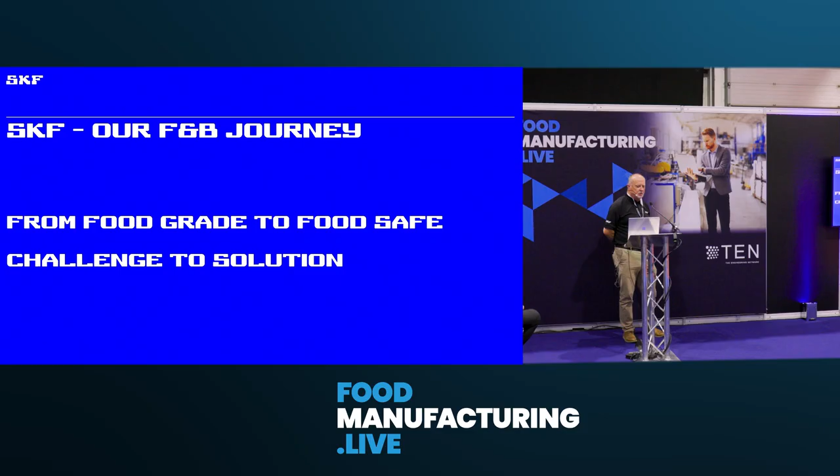Our food and beverage journey, from food grade to food safe, is very product-specific and application-specific. If you look at the pain points and challenges companies face, especially end users within the food and beverage industry, you're looking at strict cleaning regimes. These are outcomes of the increasing demands on factories to become safer, especially food safe, and this is costing unplanned and frequent production stops because washdowns are so harsh and violent that they cause bearings to break down.

To overcome this bearing breakdown, people are then over-lubricating their assets, causing more spend on lubrication and again unplanned and frequent production stops to lubricate. This then results in grease leakage because people are lubricating to purge, and this grease causes hazards, slip hazards, and an area for bacteria to collect.

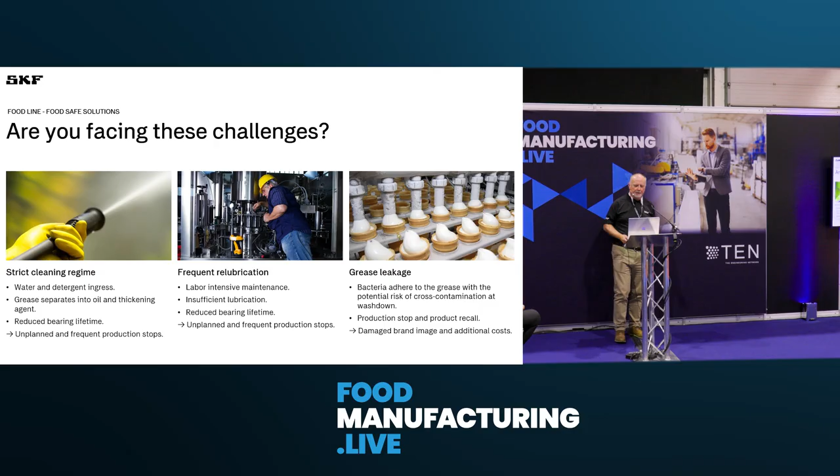With those in mind, we've come up with a product-specific range of food line offers. It all started with our blue line units. We changed everything within the blue line unit from an item which could be lubricated to a relubrication-free housed unit. This is typical for all of our housed units, and they come in all sizes and shapes to suit the market, so everything is retrofittable.

The technology we've put into this is all application-specific. We've got a back seal, a front cap good up to 70-90 bar, and beyond that a gutter seal. The main area we changed was the grease - we played with the grease and made it less susceptible to breakdown from the caustic solutions and detergents that people use.

With the blue line unit, the take-up was brilliant. We've had really good success with it. We've trialed it and it's really proved itself.

To further advance our range, we then introduced it into our deep groove ball bearings. Some of these are fitted non-food contact and food contact, but we've made all of our bearings food grade, so you'll have food grade grease in each of our bearings. So we don't go over expensive, we made them in a range which is standard bearing material - not stainless steel, but you get a good seal on there. The seal is specific to the speed it needs to move at and to keep the conditions out.

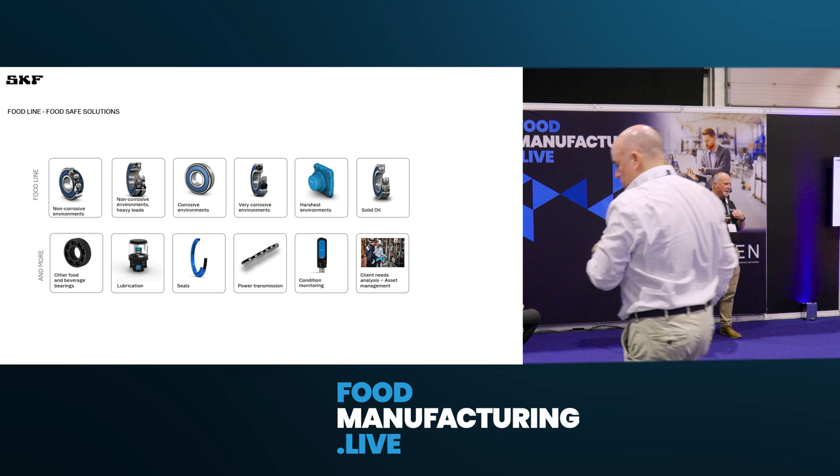The basic condition monitoring is specific for food and beverage because of the slow speeds, so we're able to read slow speeds and monitor critical assets. This has become very popular with pumps and motors, where a catastrophic bearing failure would cause a big shutdown, which costs money, so we can help eliminate that by giving a warning.

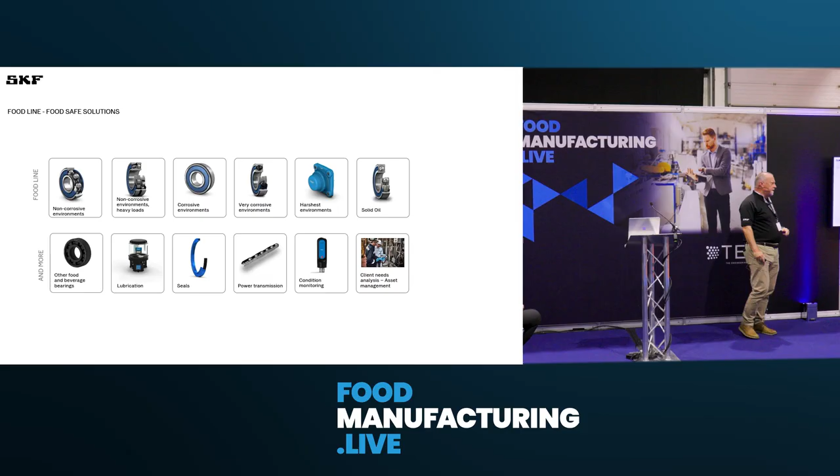To find out more about these products, come and have a chat with us on Stand 45, and we'll take you through all the benefits and features of it. We're not being product specific today with this presentation; we're giving you an overview of what SKF are doing at the moment.

By introducing those products, we've then introduced food safety, which has really been paramount to the reason for everything that we're doing.

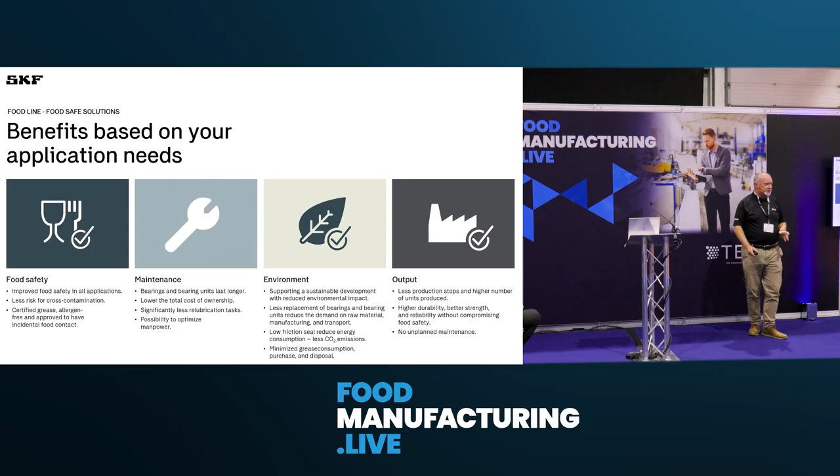Maintenance, so you're freeing up your maintenance problems. By having a bearing which lasts much longer than a standard bearing, we're freeing up the maintenance requirements. Being kinder to the environment, our housed units are 100% recyclable, and if not fully recyclable, they can be burned for energy. Our steel bearings can be remanufactured as well, so we're being good to the environment.

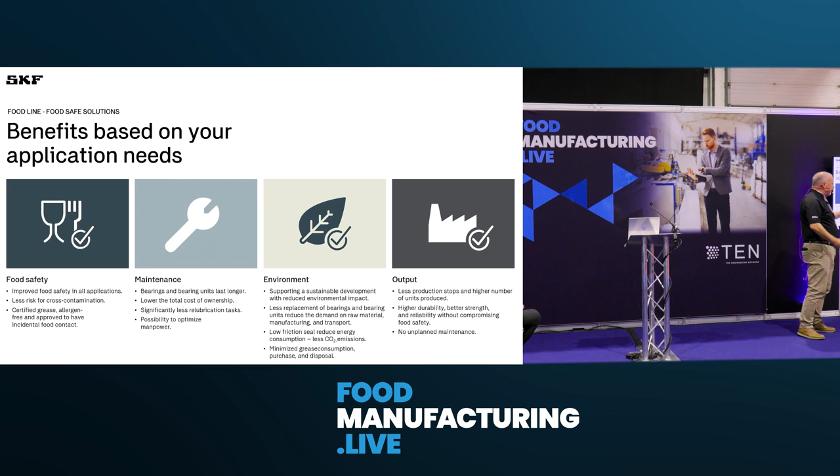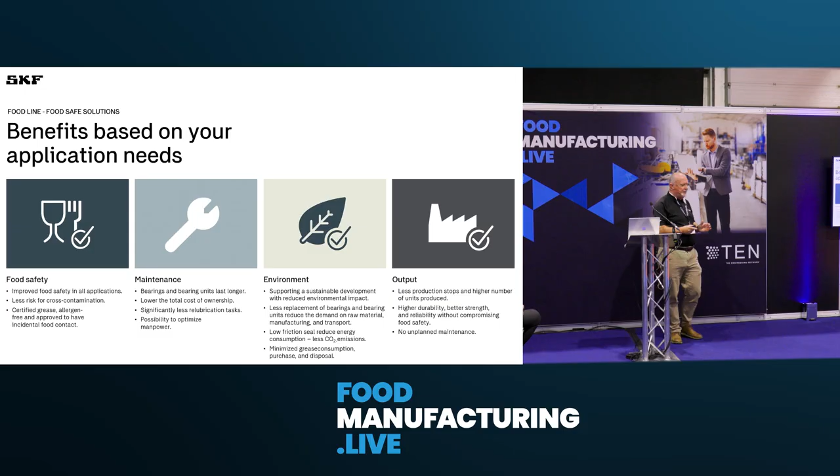For the output, we're lessening unplanned maintenance, so you can have a more planned maintenance regime instead of firefighting, and you can be a bit more sustainable.

To complement all our products, we've got our food grade seals, food grade grease, and IP69 seals. These are really important features. You're safe to know that any bearing we supply within our food range has got food grade grease and a food grade seal.

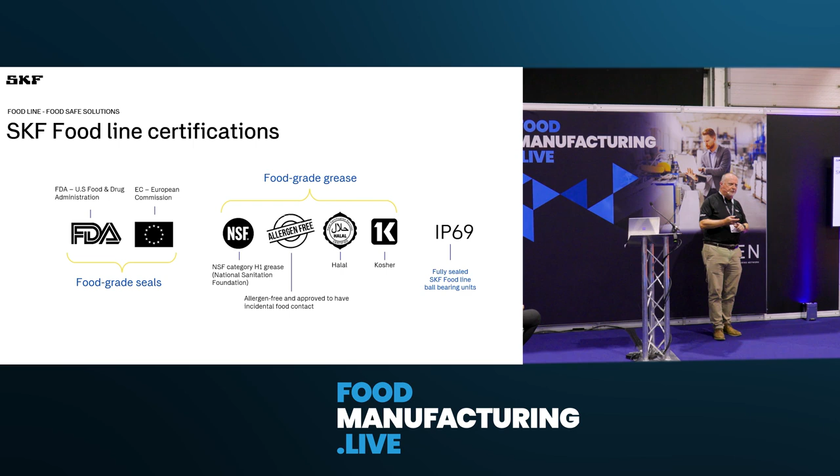If you look at what you can alter, 36% of bearings fail because of poor lubrication, and we can change that by introducing our range of products and our lubrication offers, because we understand what the bearing does. Being SKF, we manufacture the bearing and the lubrication products, so we can lessen that 36% down.

Contamination is another factor we address through our seals and what we've done with the food line bearings, along with our ability to work with customers and see where their problems lie. Poor fitting accounts for 16%, and other items make up a big portion as well, so we can start changing things around and make sure our bearings last longer.

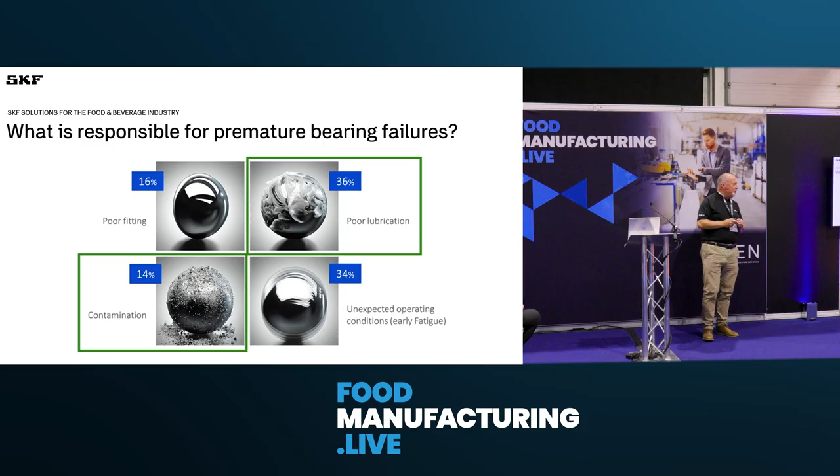Your bearing is a requirement within your rotating products, and what we want to do is make that bearing last as long as possible for you. So we always work to the bearing life cycle.

With the bearing life cycle, really important, we start with buying a bearing — purchasing through authorized distribution. This is really important because with an authorized distributor you're getting an authentic bearing. If you go through an independent, it may not be authentic, and we can't give you support on that. We'll fully support you if the bearing is bought through authorized distribution.

Then we look at mounting the bearing. We can give you worksheets on how to mount it efficiently, and we can also give you the right tools to do that. Then you're looking at lubrication — we can advise on lubrication and alignment, again all important features, along with our basic condition monitoring, which we've talked about.

We can also tell you how to efficiently dismount the bearing using the right tool. We have an app for this — it's called Bearing Assist, available on the Apple Store. If you come down to Stand 45, we can take you through all the features of that app.

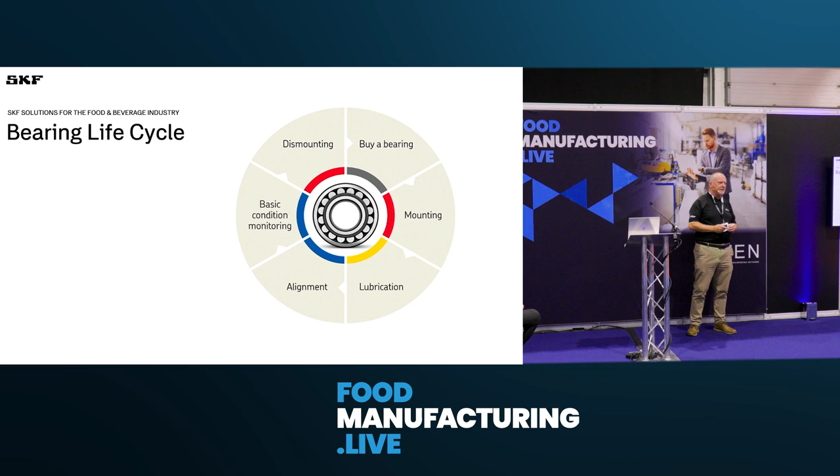To further complement SKF's journey, we are looking at becoming a really sustainable company. So we're working with the right people, and we are Platinum EcoVadis, and we're looking to be carbon free within 5 years. That's a journey we've committed to. We want to be there with where all the right companies are going, and I think it helps us when we're talking to machine manufacturers about what our journey is, and it suits their journey as well.

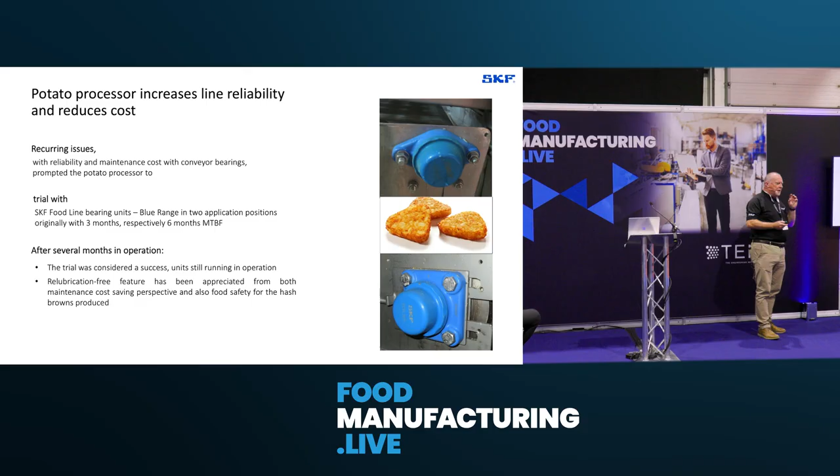So just to give you a few examples, and I hope you're not squeamish, in some of our processes we've been able to come up with real solutions. This was a company manufacturing items which needed to be food safe, and they were getting a lot of audits. So we introduced a product that outran the original product they were using. The mean time between failures doubled, and we were able to help that customer increase production. But at the same time, we became a feature with the auditors, so when they'd come in and see a Blue Range unit that's not re-lubricated, it's really clean, cosmetically perfect.

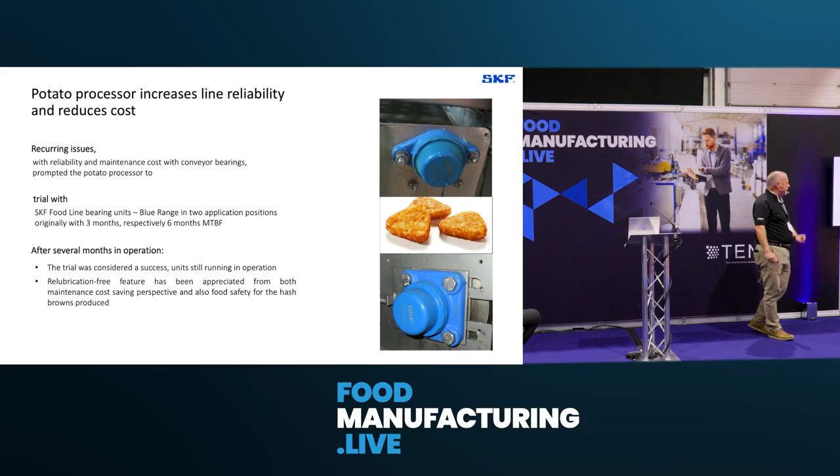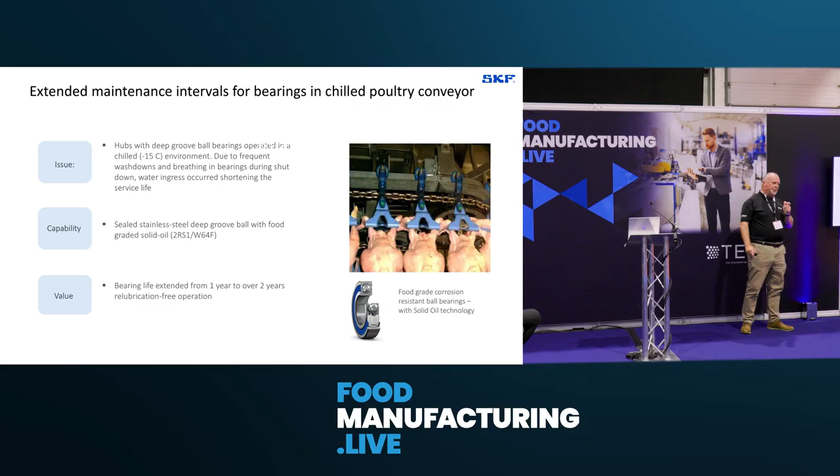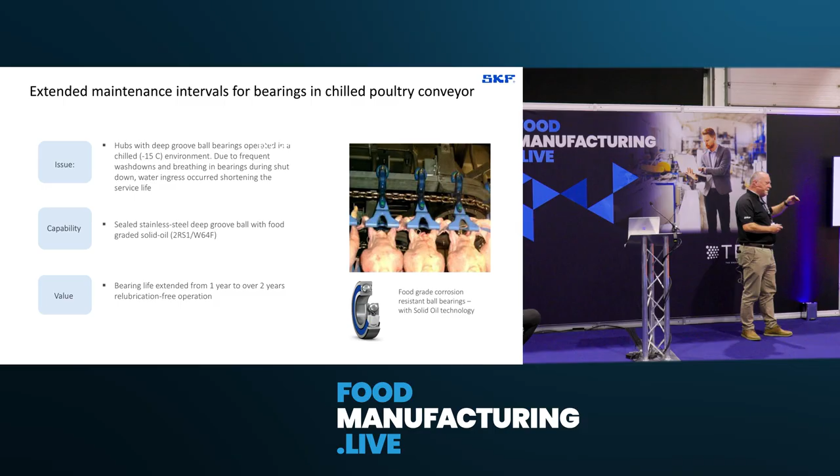Using one of our deep groove ball bearings with a solid oil, we solved a problem within a chicken processing factory. The importance here was the area was really humid, a really wet environment. The bearings were breaking down because of contamination, and this caused a bottleneck at the beginning of the process, just after the chickens have been plucked. This was unacceptable to the company. So we went in, looked at it, and brought in our Food Line bearing with solid oil and our seals as well. This was a real plus point, and we've moved this into lots of different poultry companies as well.

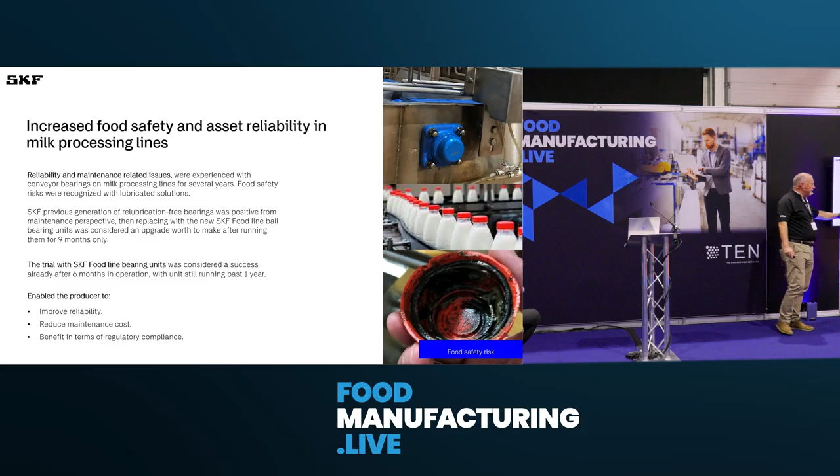And then this is what we're talking about grease-wise. This is a standard unit, this is the sort of thing you're seeing. We used this in a milk bottling plant, and we improved reliability by inputting our units and reduced maintenance costs. The offshoot from this is that we moved within a lot of dairy companies as well, and the uptake of our product within dairy companies has been second to none, because this is really unacceptable when you've got a cap full of grease, you take our cap off and there's no grease in it because you haven't been able to lubricate it.

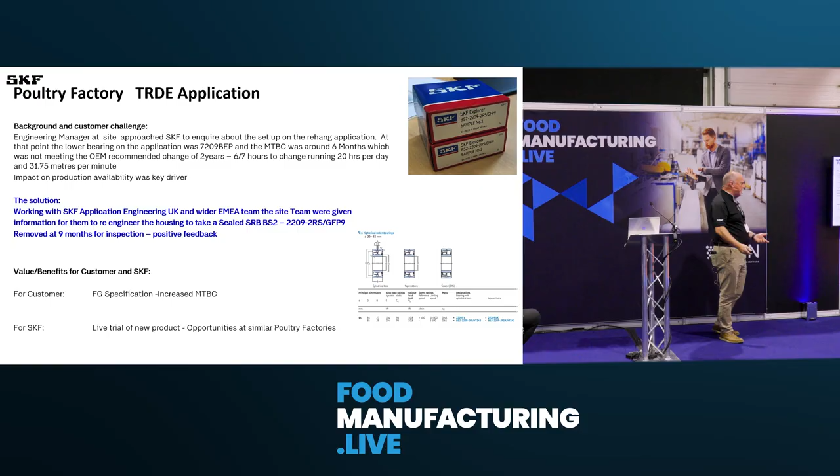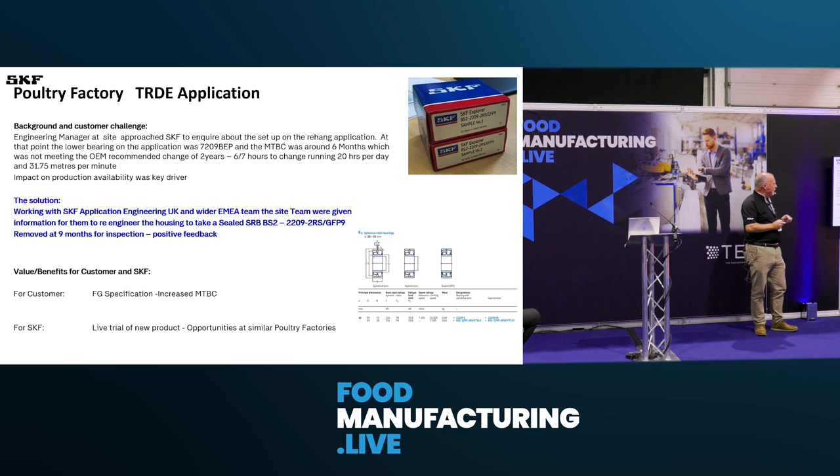This is a success we've had with our SRBs, our spherical roller bearings. Again, this was in a poultry factory, a bit more of a heavy load requirement, but we worked with the customer through our design of our product, and this is where it really helped our product take off in the SRB industry. So we introduced a series of bearings as samples, worked with them over 9 months, and it really became a plus point, and we are now able to make that a standard product. This was thanks to Sally's hard work.

So that's me in a nutshell. Like I said, come down to stand 45 and you'll be able to see what we're up to. And I'll give you Alan now, who's going to take you through some of our seals. Thank you, John.

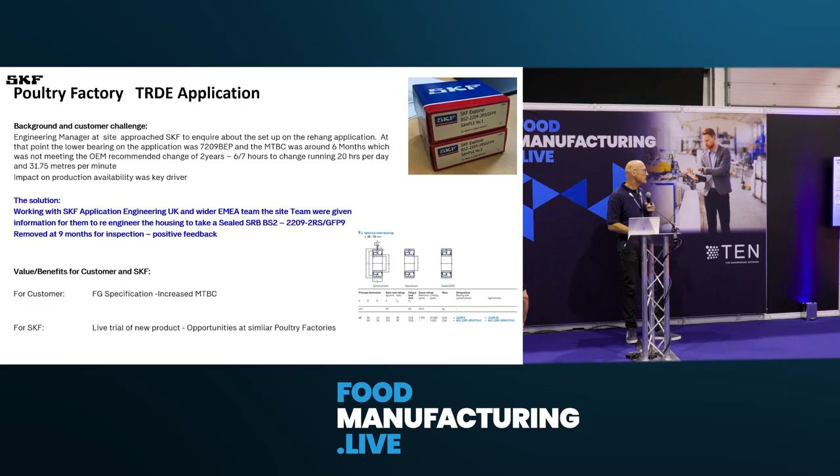So John mentioned there, as SKF we were looking at the food and bev market and engineering solutions specifically to meet your needs. So from a seals point of view, that starts with materials. We have an extensive range of materials which are certified to EU and FDA regulations for use in the food industry. You can see some examples here, things like polyurethanes, which is a very robust, hard-wearing material with excellent abrasion resistance. Complementing that, we've got our elastomers, or what people often refer to as rubber materials, so that would be things like EPDMs, HNBR, high-temperature FKM materials. And then finally we come to thermoplastic materials, typically PTFEs, whether that's virgin PTFE or filled.

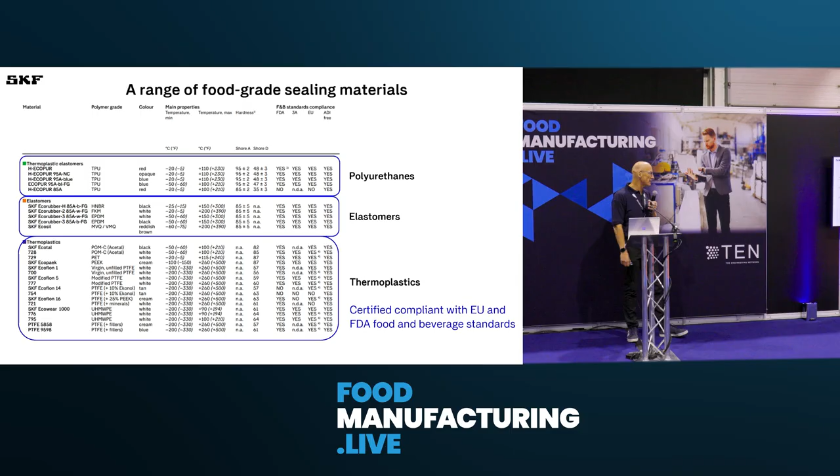So from materials, we then looked at the actual seal profiles and the requirements of seals for the food industry. From that we developed a range of standardised seals, which you can see here, specifically to meet the needs of the food industry in terms of hygiene, endurance, reliability, and performance. And complementing that range, if we can't fix a solution with a standardised seal, we've got a large range of customised solutions which we can offer for our machine seal solutions, whereby we can make small quantities, large quantities, tailored to your specific needs.

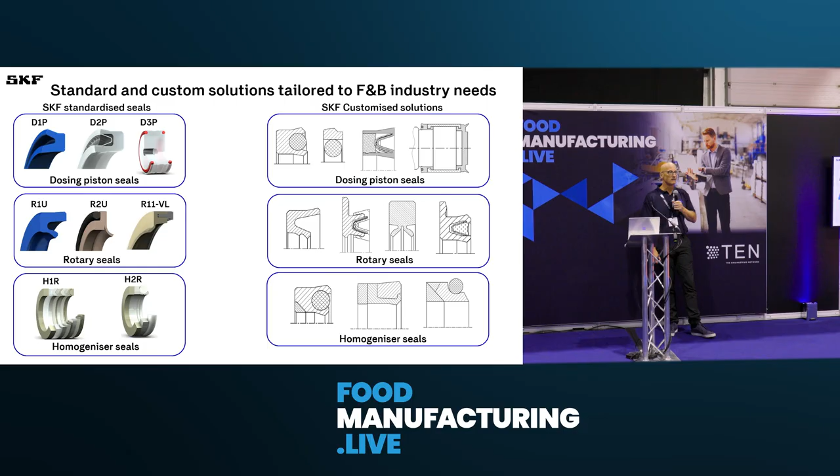Again, if we move on to successes that we've had in the industry, just to give you a feel for what we can do. In this first example here, we've got a filling machine. This was for dairy products, so primarily yogurt.

Customers were having mainly issues during the CIP process, whereby the existing seals were swelling, causing the depositor to seize up, and they're having problems with fill due to dry running after the cleaning cycle.

So we looked at the application, and for this we were able to offer one of our standard food and beverage seals, the D1P, made from polyurethane, for actually depositing the product. And then on the back of the piston here, we can see a PTFE seal which is energised by rubber, for the vacuum, the drawing in of the product in the cycle of the process.

And we selected that because PTFE has very low friction and it's a light contact seal, just to improve performance. So with this solution, we managed to increase the service life, reducing the amount of times the customer needs to replace seals, increase reliability, and we had materials compatible with the CIP solutions which overcame the primary problem.

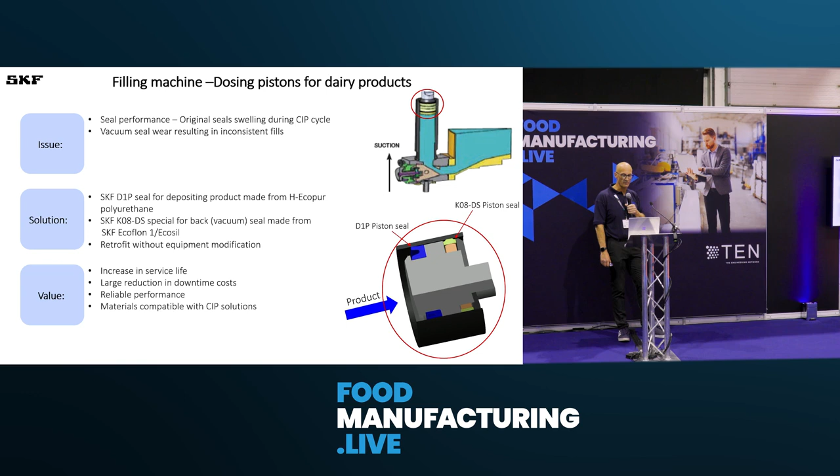The problem here was the seals weren't preventing the product, which would be things like syrup, water, dried fruits, that kind of thing, from entering the bearing housing of the gearbox, which was causing early failures of the bearings.

So our solution in this case was to look at the complete arrangement of seals and offer a solution that could fit into the existing housing. We simplified it by reducing it to 4 seals instead of 6, or 6 components.